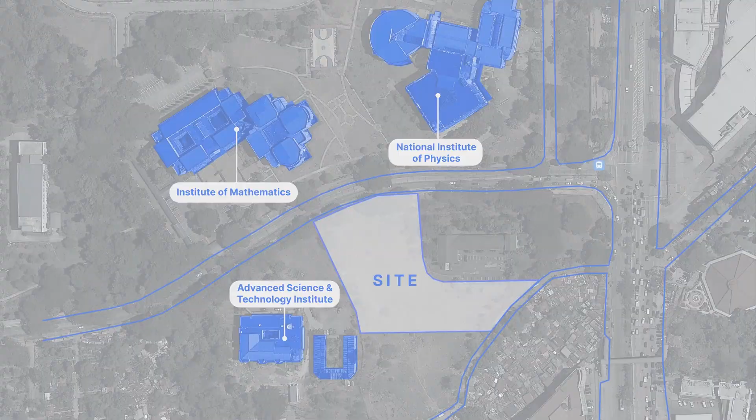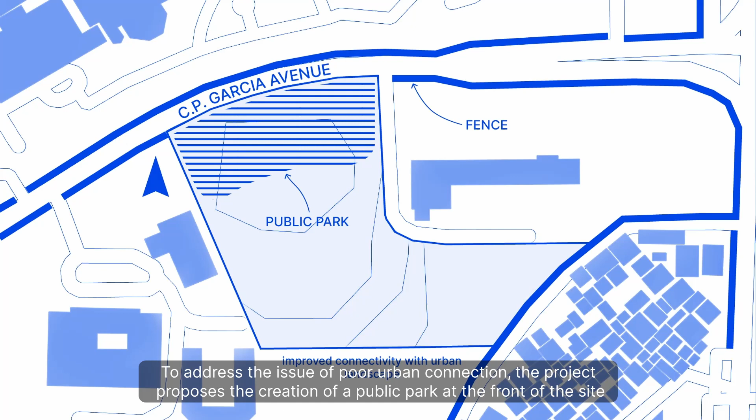However, the site's unique characteristics also present challenges. It is largely fenced off from the surrounding urban fabric, which, while providing security, isolates it from the city. To address the issue of poor urban connection, the project proposes the creation of a public park at the front of the site adjacent to the avenue, ensuring engagement with passers-by.

AI tools played a central role throughout my project's development. These tools are strategically applied in the programming, design translation, and schematic design phases to enhance the project's efficiency.

To begin the programming phase, I conducted desk research to identify essential spaces required for the research center, including libraries, classrooms, and a black box theater.

However, the project goes beyond the basics. Recognizing the need to accommodate allied fields like visual arts and social sciences, I consulted ChatGPT to determine additional spaces necessary for these disciplines. The resulting list of key spaces integrates my own research findings with ChatGPT's recommendations, aligning them with the project's design goals.

The design translation phase involves the transformation of conceptual ideas into tangible architectural elements. I established the concept of the neuron as a guiding theme for the design, given its historical significance in AI development.

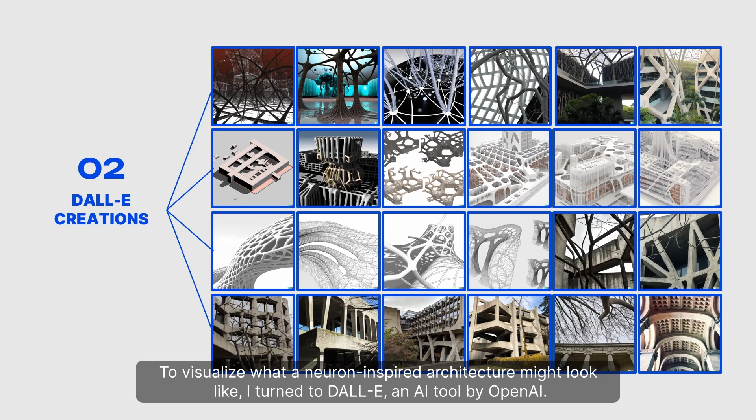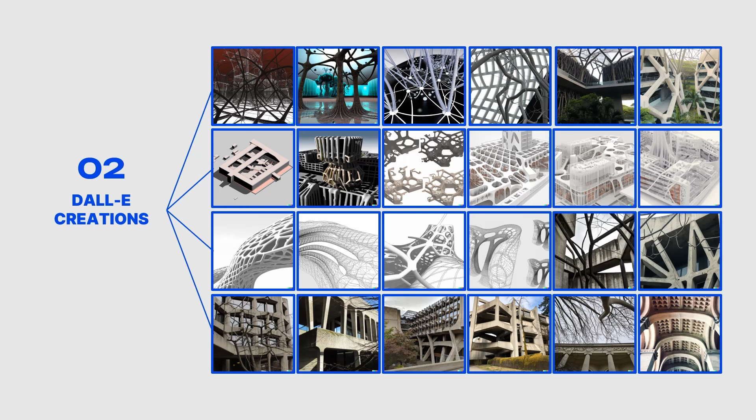To visualize what a neuron-inspired architecture might look like, I turned to DALL-E, an AI tool by OpenAI. Using the prompt neuron-inspired architecture and specifying various architectural styles such as brutalism and deconstructivism, I generated 24 images. These images were then analyzed to identify common themes that could be incorporated into the design translation.

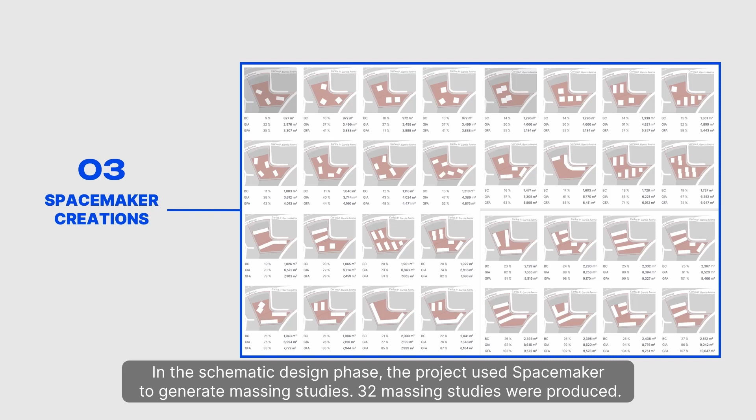In the schematic design phase, the project used Spacemaker to generate massing studies. 32 massing studies were produced, and 4 were initially selected based on their consistency with site analysis and their suitability for applying the design translation concepts.

Comprehensive analyses such as daylight, noise disturbance, sun exposure, and wind flow were conducted on each of the 4 massing studies. The study that performed best across these climate adaptability parameters was chosen as the foundation for further development.

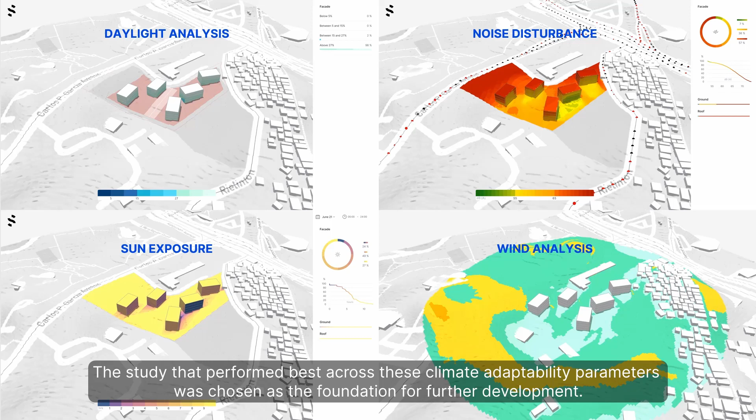The selected massing study served as a starting point for design development. The concepts of connectivity and centrality were emphasized, leading to the inclusion of connective elements between the 5 primary masses.

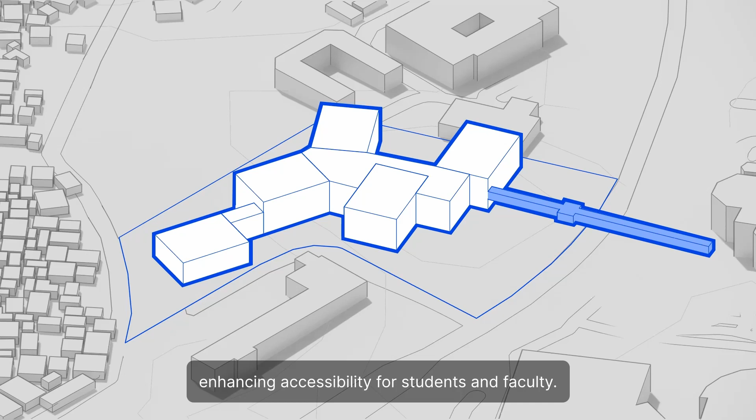An essential addition was a footbridge connecting the research center to the College of Science complex, enhancing accessibility for students and faculty. At the very front of the site, like a buffer between the building and the avenue, is an art park for public installations related to AI.

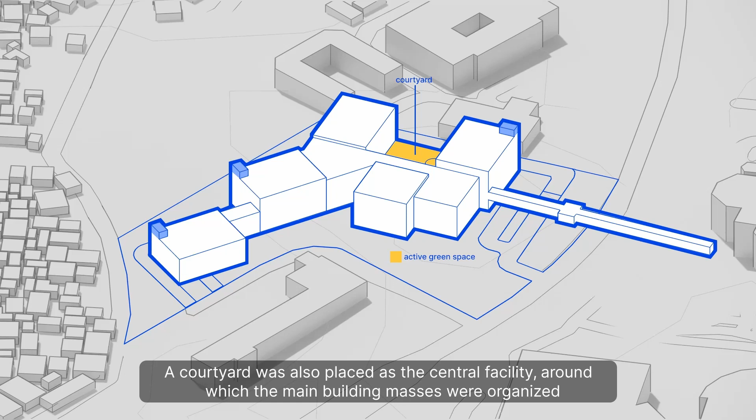The courtyard was placed as the central facility around which the main building masses were organized. This served as an open space for assembly and recreation.

Kinetic aluminum sunshading panels, controlled by computers to adjust automatically to the sun's direction, are incorporated into the facade, enhancing the building's functionality and sustainability.

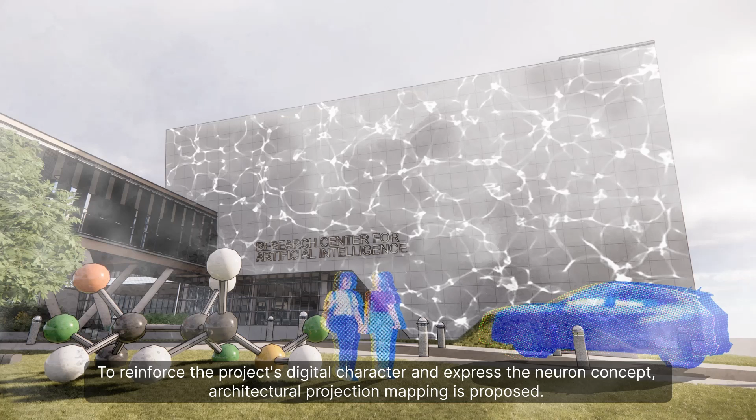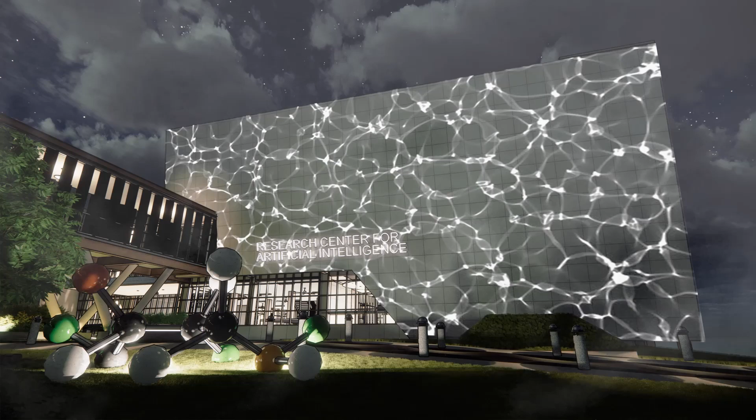To reinforce the project's digital character and express the neuron concept, architectural projection mapping is proposed. This dynamic feature allows for the projection of caustic patterns on concrete surfaces resembling neurons. It also serves as a platform for announcements and promotions, further engaging the public.

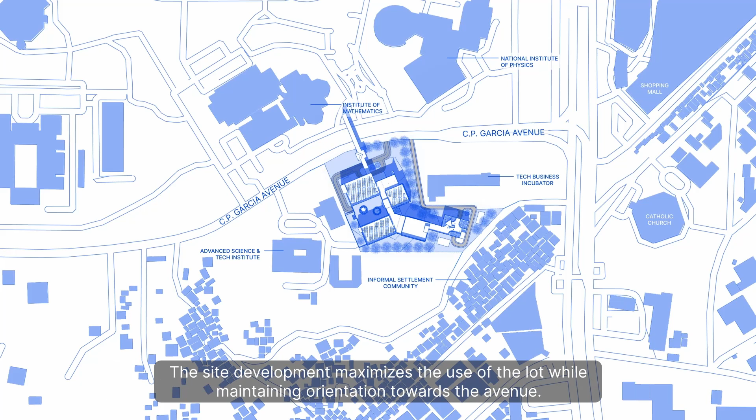Efficient zoning and circulation are crucial aspects of the design as well. The site development maximizes the use of the lot while maintaining orientation towards the avenue.

This project addresses the lack of supportive spaces for AI innovation in the Philippines and proposes a way in which we can incorporate emerging AI tools in our design process. Human creativity perseveres still in our industry that is being permeated by the machine.